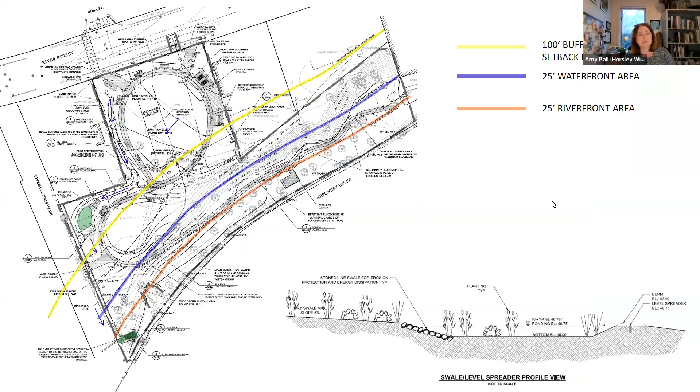Okay, so you sort of covered it in a nutshell, and our letter that we submitted about a week ago really covers two basic things: the landscape design, based upon the conversation we had with the commission in April, and also some comments on the stormwater. So I guess I'll just tick them off one at a time. No pun intended on that tick. Okay.

We had been advised that there's some additional beaver herbivory along the Neponset River. Based on what we came up with DCR and the project team, we believe the best avenue for initial assessment would be to monitor any new plantings once they go in during the establishment period.

And if there is a concern about herbivory, be it beavers or other species, we'd like to come back to the commission with a plan to take measures. We had initially thought about an enclosure fence around the whole area, but thought there might be concerns about cutting off the river and wildlife habitat for species migrating along the river. So I don't know if we want to touch on these each quickly, then go back to questions, or discuss them intermittently.

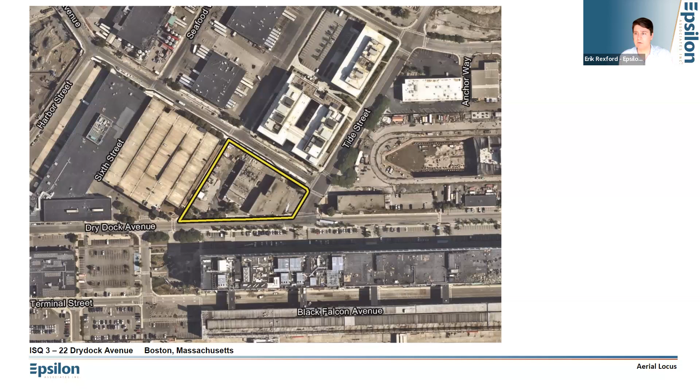Thank you. So the project site is at 22 Dry Dock Avenue. The future development parcel is shown in the yellow boundary. Northern Avenue is to the north of the site, Dry Dock Avenue to the south, and Tide Street to the east. Can you go to the next slide, please?

For the purposes of this notice of intent, we're respectfully requesting an order of conditions for site enabling work. That enabling work consists of two components. One being the replacement of subsurface utilities, specifically the electrical duct bank along Dry Dock Avenue, as shown in yellow, and a short segment on Tide Street as well.

And the replacement of a storm drain in Northern Avenue, shown in the blue shaded area. The second component of the site enabling work is site demolition, removal of the existing structures and appurtenances at the project site, shown in the purple shaded area. The entire site is within the South Boston designated port area, so DPA resource area, and land subject to coastal storm flowage.

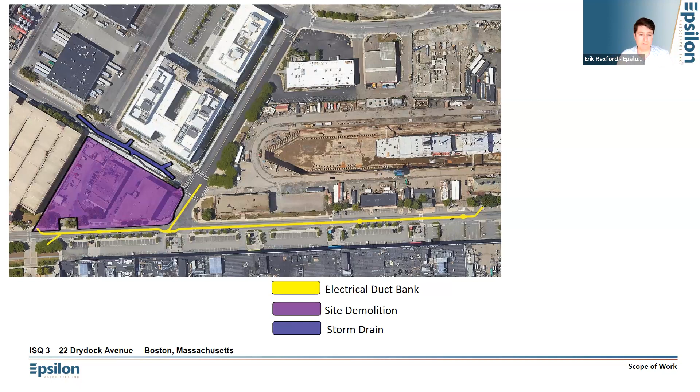These are the limits of work for those two different elements of the enabling work. I'm sorry it's a bit hard to see on this image, but that blue hazy shaded area is the land subject to coastal storm flowage from the most recent FEMA flood insurance rate map. So all work will occur within land subject to coastal storm flowage, and of course, entirely within DPA.

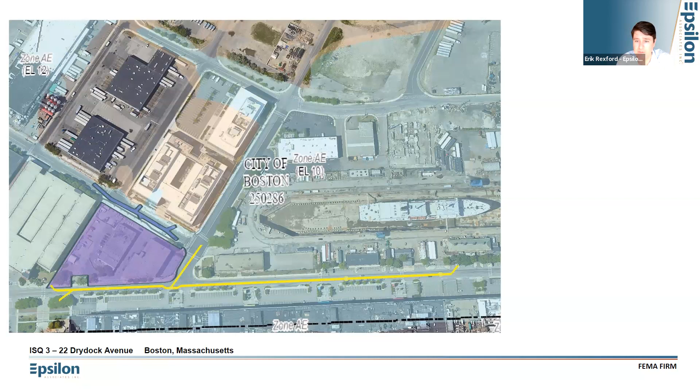Site plan, this is from the PNF, and I'm sure this is what you saw last night, Chair. Just to give you a sense of the future development, this will be the subject of a separate notice of intent, but we'll be more than happy to coordinate that site plan and landscape plan with the commission as we get closer to that filing.

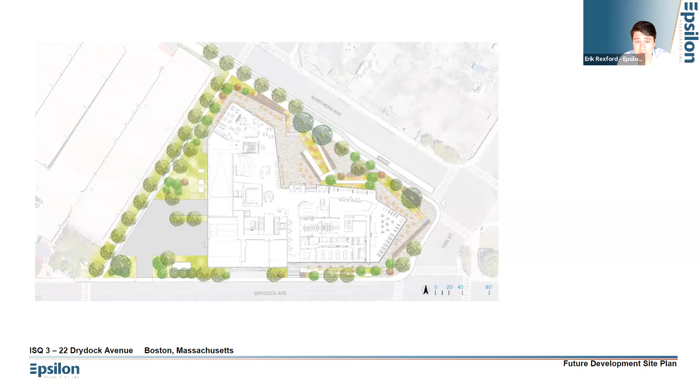Obviously connecting to existing services, but there are 4 new drain manhole positions proposed. They're sort of in the middle of the alignment where there's that slight bend in an otherwise linear feature.

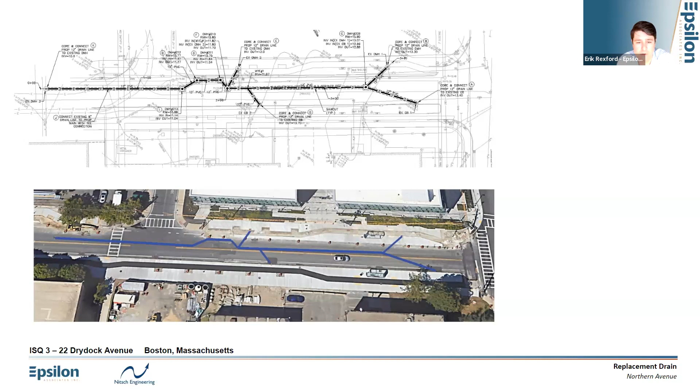The next slide should show electrical duct bank to be installed in Dry Dock Avenue and Tide Street. In total, it's about 1,800 linear feet of duct bank. At the westerly end, it connects to existing service south of Dry Dock and continues up onto the project site, where a new utility pole will be installed as part of this enabling work.

In addition to the duct bank, there are electrical manholes, 2 in total, proposed to be installed. They're represented by the rectangular boxes. So one just south of the project site, the other one at the intersection of Tide and Dry Dock.

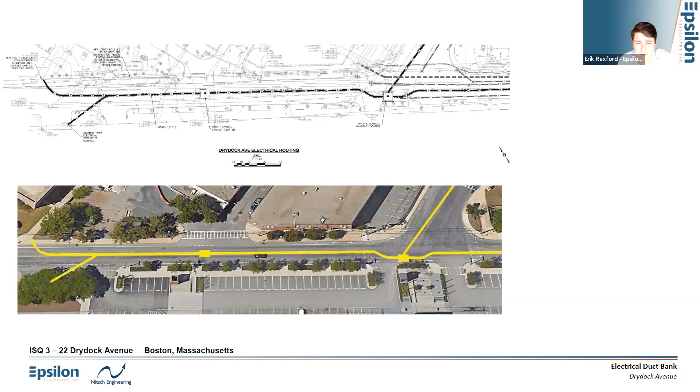Next slide, please. Just more duct bank, it's a long stretch of duct bank. This is a little bit further east on Dry Dock, another electrical manhole proposed in that position.

Next slide, please. It should be the terminus on another electrical manhole, and then the terminus of the duct bank at 24 Dry Dock Avenue.

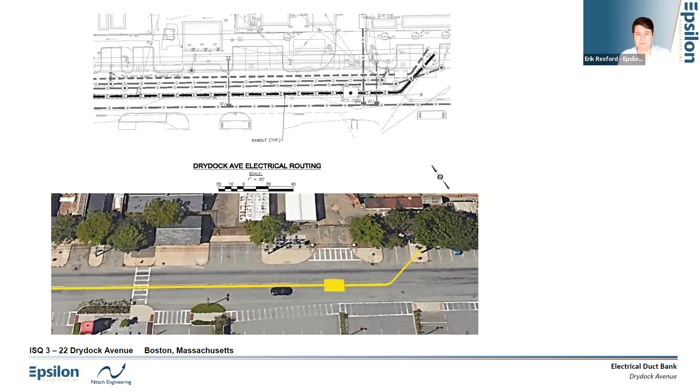Next slide, please. This is the Tide Street duct bank, and I apologize, the orientation of this figure is shifted, north is now to the left. But the duct bank will continue from the intersection with Drydock up to an existing Eversource manhole.

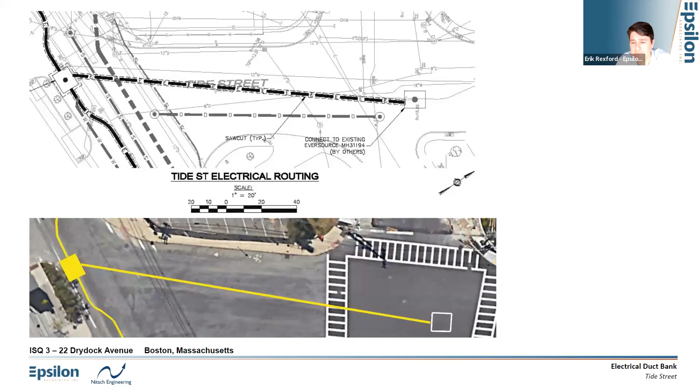Next slide, please. This is the building addressed at 20 Dry Dock, a single-story brick building to be demolished. Next slide, please. Erik, how big is that building?

I can look it up for you, I don't know the square footage off the top of my head. Craig, do you or Chris know? The 22 Dry Dock building is about 30,000 feet, and the 20 Dry Dock building is about 20,000 feet. Just rough round numbers. Yep, got it.

Thank you. So 22 Dry Dock building here, a 3-story brick building. Both structures are vacant at this time. There is some vegetation on site, primarily street trees. You see them in this image and in the previous as well. But mostly the site's impervious surface, all to be removed. Next slide, I believe, is the demolition plan.

There's a lot going on here, I apologize for that. The dark black outline is the footprint of the future development building, just for reference purposes. This shows otherwise everything to be demolished, including the 20 and 22 Dry Dock Avenue structures, subsurface utilities that will also be cut and capped in the adjacent rights of way.

I mentioned there is some vegetation on site, primarily the street trees. There's a couple on Northern Avenue, around the corner on Tide Street, and along Dry Dock Avenue. Those will be removed as part of this enabling work as a temporary interim condition until the redevelopment project is before the commission with a comprehensive landscape and site plan. A few trees at the southeast corner, the bottom left-hand corner of the site, will be maintained and protected during the enabling phase.

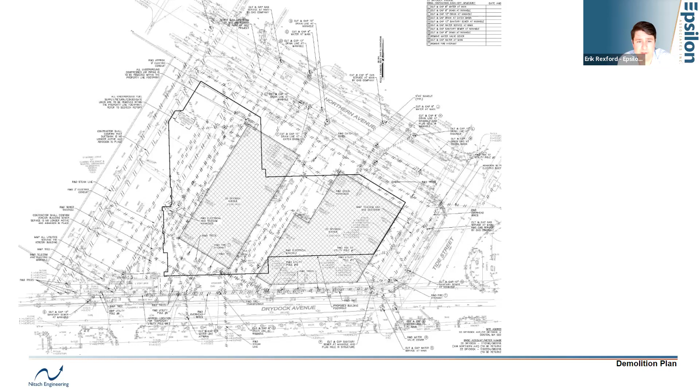Next slide, please. Sorry, this orientation got stretched a little bit. Limit of work is the dark dashed line around the project site. Inside that limit of work, construction fencing will be installed. On the work side of that construction fencing, erosion control barrier will be installed around the entire perimeter of the site. A stabilized construction entrance will be established at Drydock Avenue, that's the gray rectangular feature at the bottom left. Next slide, please.

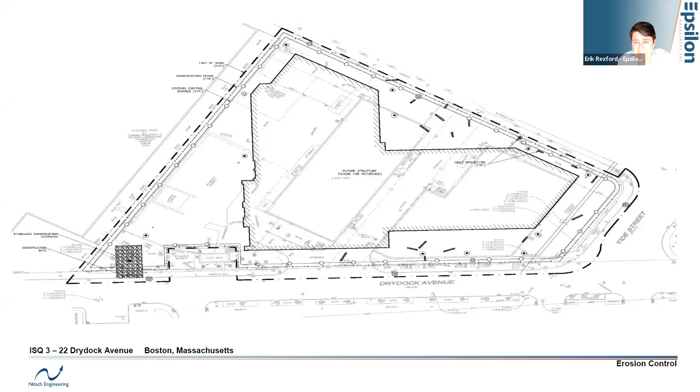The construction entrance I described, there's a detailed drawing of it on the left, intended to keep material and debris from migrating off site.

Sediment control, erosion control barriers, the four detailed drawings at top right, that is the polypropylene fencing that will be installed inside of the construction fence, staked 6 to 8 feet on center. There will be a filter fabric at its foot and straw wattles staked as well.

Down gradient BMPs will be protected with a silt sack or a comparable product. For the trees, there could be fencing around those to be protected, and or trunk armoring, just to make sure those trees are protected during the enabling phase.

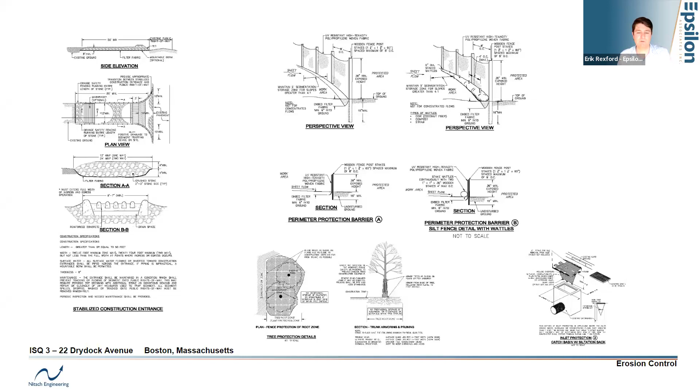For the subsurface utility work, it'll mostly be conducted in small work areas. Dry Dock Avenue has to remain open throughout this phase of the project, so exposed trenches would be plated during non-work hours so vehicles can maintain use of Dry Dock Avenue, Northern Avenue, and Tide Street. Once backfilled, the trenches will be patched.

Street sweeping and other housekeeping will be done on a daily basis just to minimize fugitive dust and transfer of sediment material outside of the limit of work. Rubber tire vehicles will be used for all work in the streets, and no material will be stored inside the floodplain, so pretty much everything's going off-site as it's excavated.

Clean material will be brought on site for backfill and bedding as necessary. And the applicant anticipates filing a notice of intent for coverage under NPDES's construction general permit.

With that, turn it back over to the commission. Happy to answer any questions.

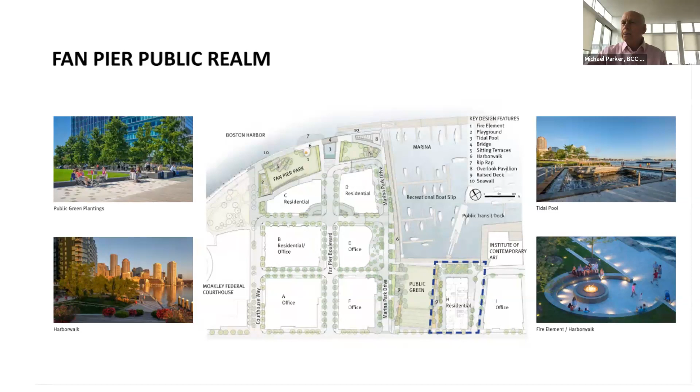Great, next image please. So on the left is what Lydia was describing, 3 layers of parking. Underneath this, you can see the building grid and the outline of the building, the rectangle going north and south. Right now we have 3,660 square feet of green on the top there. It's really eroded lawn, there are 0 trees on site. And then over on the right is the proposed plan, where we have about 6,240 square feet of landscape proposed, and 36 trees as well. You can go to the next image.

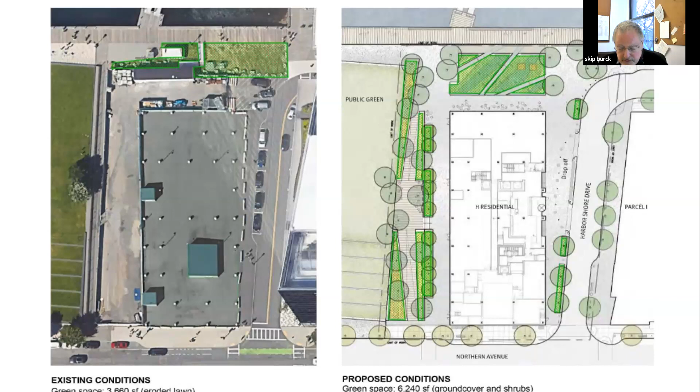The kinds of shrubs we're proposing are red twig and yellow twig dogwood, which exists on the west side of the public green. They've been there for about 12 years and provide a lot of color through the winter. We also have proposed sweet fern, inkberry for some winter evergreen color, and meadowsweet, which is a spirea. In addition, there is a large mix of grasses, forbs, and evergreen and deciduous ferns.

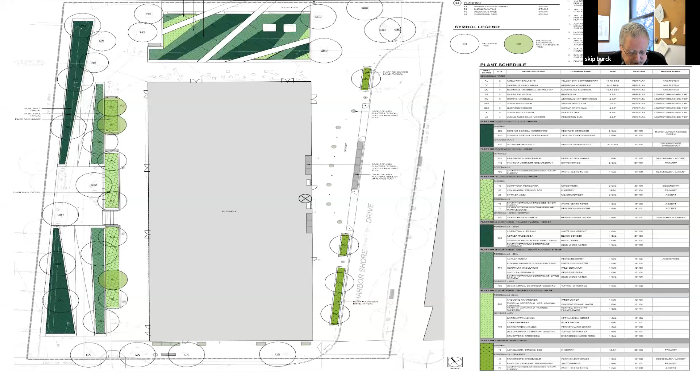Yes, thank you, Skip.

Next slide, please. So this is just to let you know why we're here before you. We're in a land subject to coastal storm flowage, which has a couple different flood zones in it. You have the AE zone, which is 17.46 Boston City base. Then a second AE zone that's a foot lower at 16.46. You also have the VE zone that's right along the edge of the seawall. And then we have the city's local ordinances, the 25-foot waterfront area and the 100-foot waterfront area. There is a small section of site that is in zone X, which is outside the coastal storm flowage, towards the front of the building.

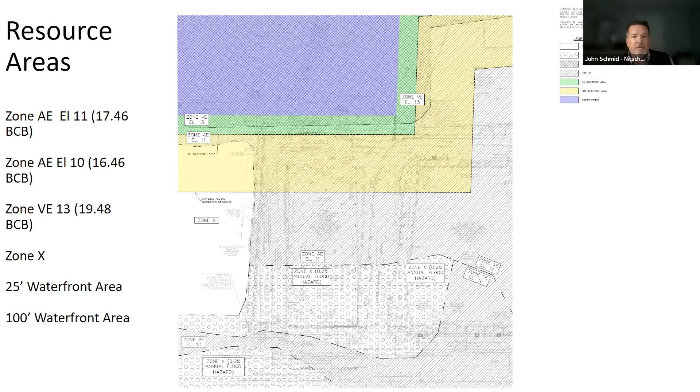That being said, I'd like to move to the next slide. I don't know if Joe has joined us on the call, and if he hasn't, I can speak to this.

So this is to show you how the project is prepared for resiliency. Northern Ave elevation is about 17.8, and our transformers and switch gear are at elevation 21.5, which is 4 feet above the FEMA BFE, above the BPDA's requirement and recommendations. The lobby is also at elevation 21.5. The retail, which is at grade, is 17.91, but people will enter the building and then through escalators or stairs, they will raise up to the higher elevations. You can see the existing 3-level garage below the building, which was constructed in 2017.

The site will be completely encased in an aqua fence. Fallon Company has been using the aqua fence for the past several years for all of their buildings, and they have a deployable system that they break out once a year and train themselves on how to deploy it. So should there be a storm event here, the aqua fence will be deployed in preparation of a flooding event.

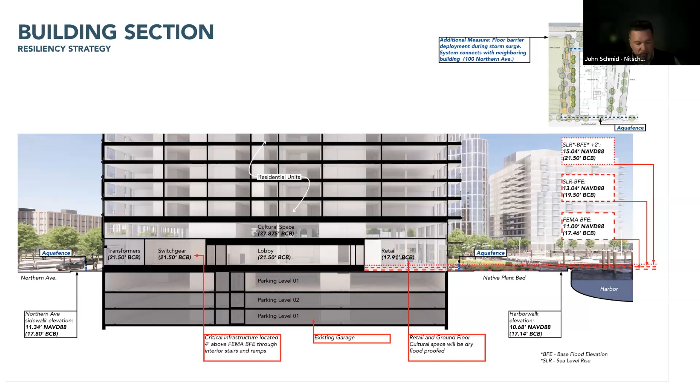I guess the next slide, please. Yeah, back to me. Yes.

Back to Skip. So this is a somewhat edited template that we use for all of our harborfront projects. After Superstorm Sandy in 2012, a group of people, landscape contractors and landscape architects who had projects seriously affected by that storm got together, put on a really interesting seminar, and went through all of these different aspects of waterfront open space design. We've been adhering to this and expanding it where we can, but I'm not going to go through every bullet item, just a few of them.

Obviously, plant species are selected for tolerance of marine environment. Ensuring that that planting could survive would be an automatic irrigation system, so that the landscape could be rinsed with fresh water if it's been inundated with salt water.

Electrical was interesting. It was the highest cost damaged element in Superstorm Sandy. We use these IP68 rated light fixtures, which are submergible for a period of time. And we've learned to ask for custom electrical splices, very long rat tails emanating from the fixtures, so that we're trying to keep these splices outside of areas that might be inundated.

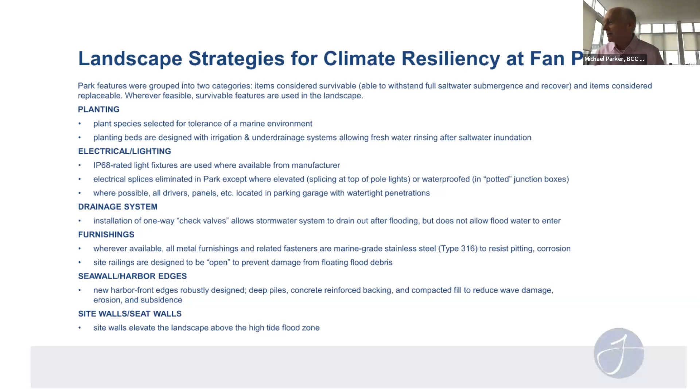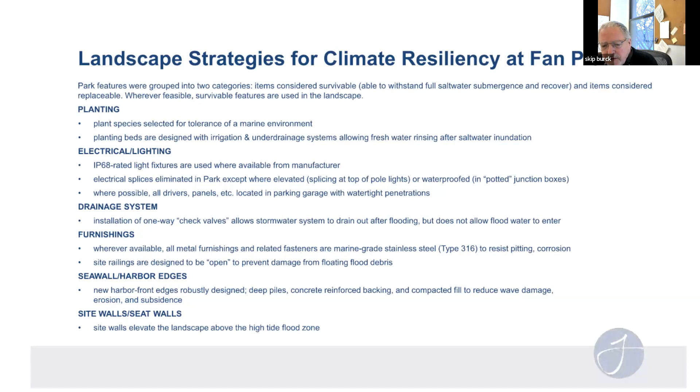And then lastly, and I think this is really important, everywhere we can, especially in the parks we designed a couple of years ago to the northwest on the Harbor Walk, we've been using seat walls that elevate the landscape, the lawns and the plantings, above Harbor Walk to further ensure they can survive these king tides that are associated with storms. That's been very successful, and we're certainly doing it on Fan Pier Parcel H. With that, I think I go back to John. Thank you.

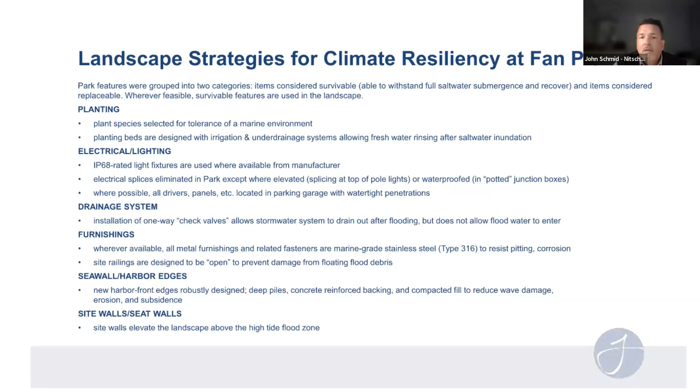So next slide, please. As indicated, this foundation was built and capped in 2017, and at that time the water, fire, and sewer services were installed and capped as well. So those are already connected to the foundation.

New construction will add the electrical feed from Northern Ave that you can see at the bottom of the screen, but primarily this is for stormwater management. We are providing a stormwater recharge system, a below-grade perforated pipe recharge system placed along the building foundation, that will collect in excess of the 1.25 inch rainfall event from the site as well as the building. We are actually collecting and storing about 2,100 cubic feet more than what is required by BPDA and BWSC.

This plan has been submitted to Water and Sewer for one round of comments, and we made the second submission for review and comment at the end of last week. So it's currently being vetted by Boston Water and Sewer.

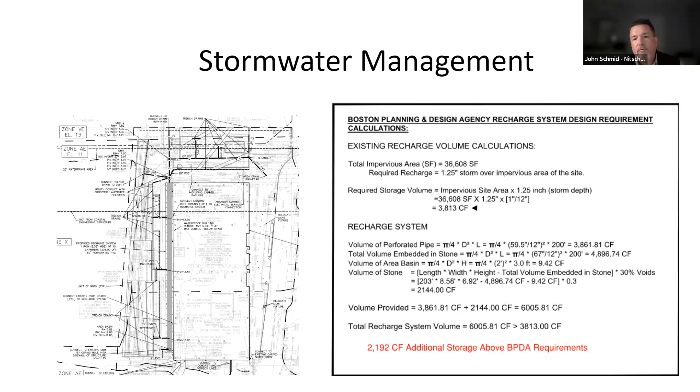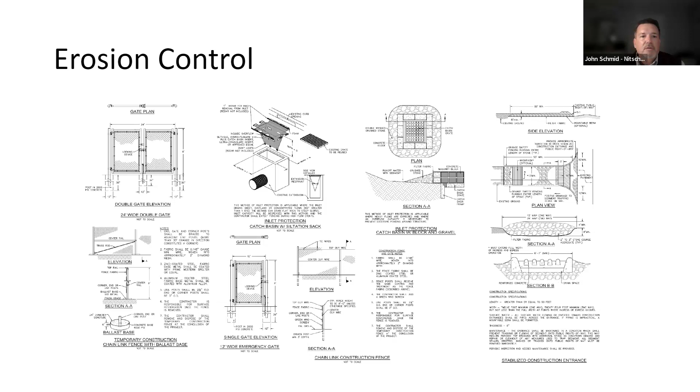Turner Construction will be performing this work, and they've done all the work on all the buildings to date out of Fan Pier, so they're very familiar with the area, the site, and the city's requirements and expectations.

Also, anticipating a question that may come from the commission: how are we prepared for storm events or flooding conditions? The project will monitor weather forecasts, and if a significant storm or flooding is anticipated, mobile equipment and unconsolidated materials will be removed from the area as described in your condition 82 of the draft conditions. Materials that cannot be removed will be tied down. Any stockpiles will be covered and secured per your condition 44. And if the site allows, the deployable aqua fence will be installed around the existing buildings and potentially around this site, depending on where we are in construction, should a storm event occur.

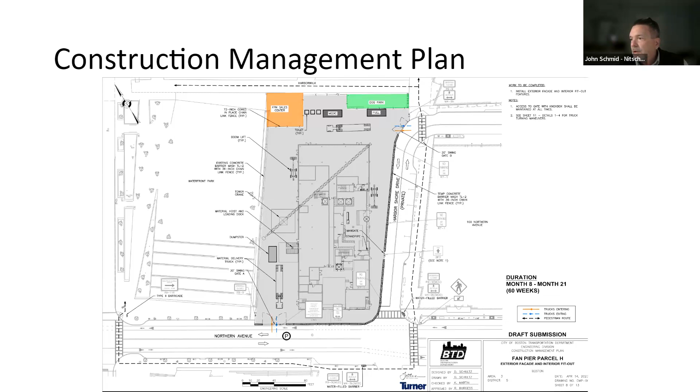And next slide, please. I think that ends our presentation, and we're available for questions.

Fantastic, thank you. I just realized I saw this also last night at BCDC, so I'm well prepared tonight for our hearings. Couple quick observations or questions. John, I think this is a question for you.

Fantastic, thank you. The aqua fence, I remember Mr. Martini invited us out for a display of the aqua fence one year, and I went. It's actually pretty impressive to watch. I hope that invitation is still out for other commission members who want to see that in action.

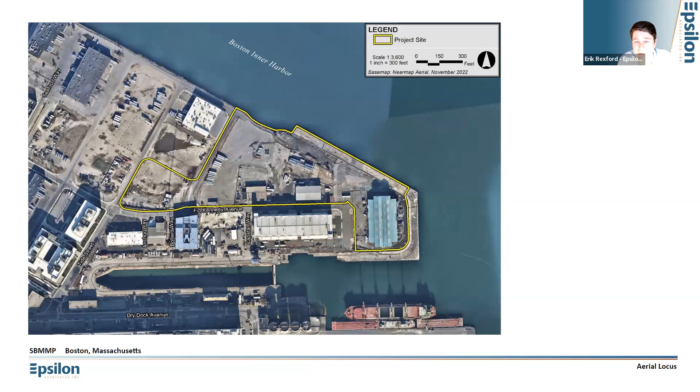By way of background, the applicant intends to rehabilitate and reposition the project site as a multi-port marine terminal to accommodate the transshipment of bulk, break bulk, and project cargo. That rehabilitation project will be the subject of a future notice of intent. For the purpose of this notice of intent, we're respectfully requesting an order of conditions to implement a subsurface geotech and sediment sampling program. Next slide, please, Elena.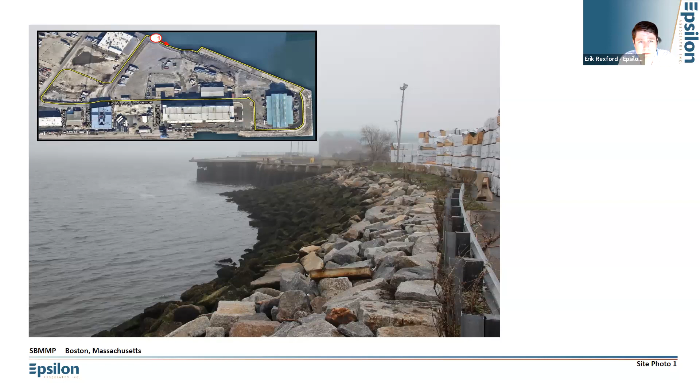This image is taken in front of the Subaru building, looking in an easterly direction. If it wasn't so foggy, you'd see Logan in the background, but it's an image of the north jetty, the concrete deck of the pile supported structure. In this photo, I'm standing behind the sheet pile bulkhead. That transition from concrete to asphalt is the approximate location of the sheet pile bulkhead. Next slide, please.

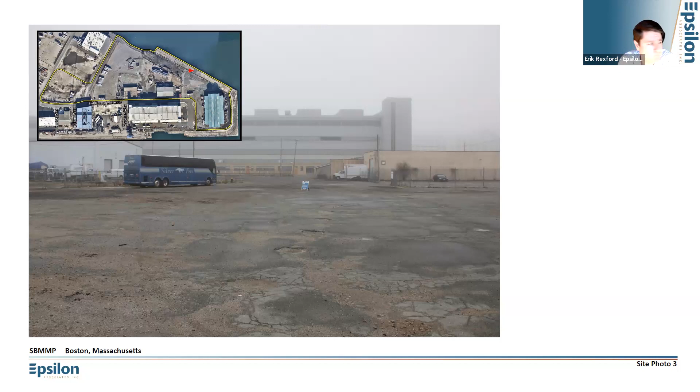Nearly the entire site is located within land subject to coastal storm flowage. It's entirely within the South Boston designated port area as well.

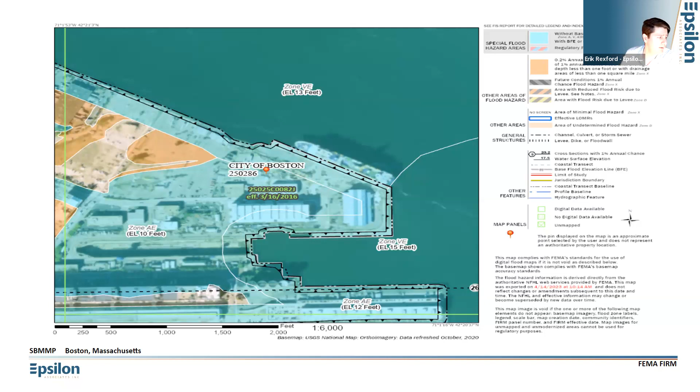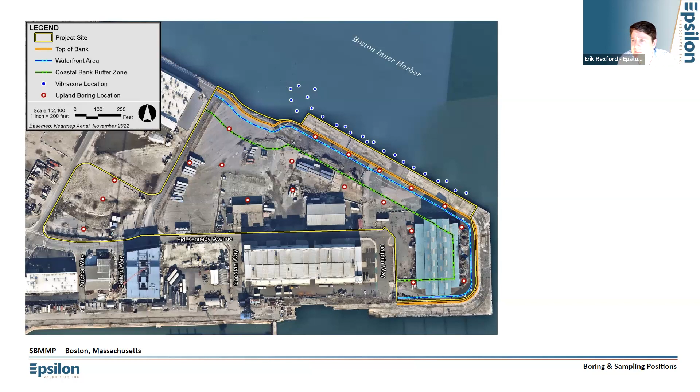Great, thank you. I don't. I just wanted, Brad, to acknowledge that you have submitted the obligatory Massport letter that refuses to recognize our authority over Massport, but does acknowledge our existence because he is performing an essential government service. So thank you for appearing to keep us in the loop.

With that, Elena, do you have anything on this? No, not on this.